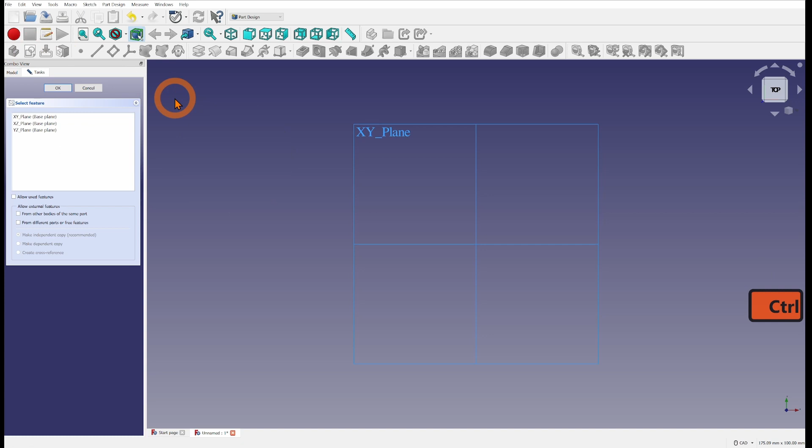Alright, so let's create a new file and let's change to our part design workbench right here. Let's create a new body, this icon right here, and let's pick which orientation we want to draw this in. So I think top is just fine. Let's create a new sketch, clicky, select our XY plane, and let's move over right here because we're just going to be drawing in this section right here.

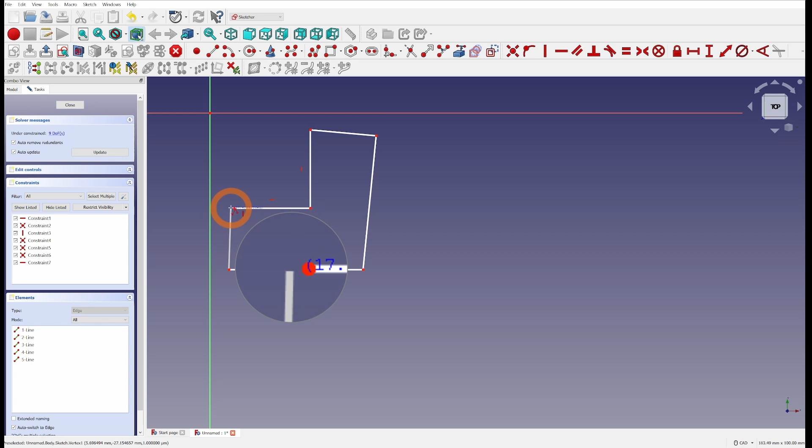Let's use our buddy, the old polyline tool, clicky, and right now let's throw caution to the wind. So let's just draw this shape right here. And when you get to the end point, you want to click on the first point till it goes yellow like this. And you'll know you've done it right when the command just ends. So now let's constrain this guy up.

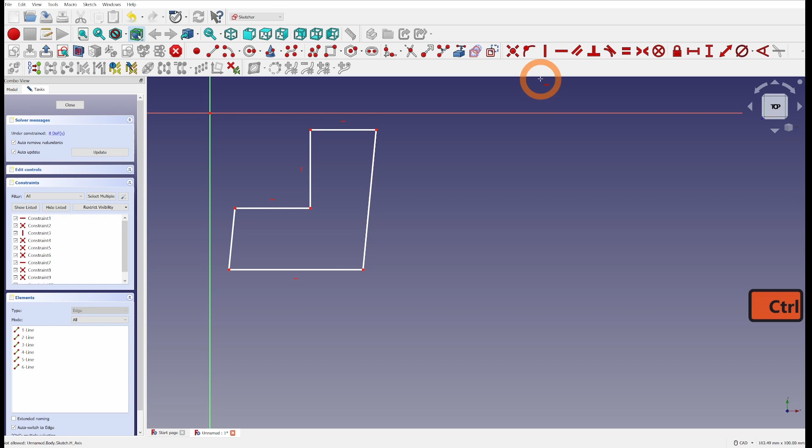So first of all, let's use our horizontal constraint right here. And I can see this guy already has one, this guy already has one, and this guy does not. So we're going to add one. Next, we're going to add the vertical constraint. This guy right here, clicky. All right, this guy already has one. This guy does not. So we're going to click here. And lastly, let's click on this guy. And this guy has one now.

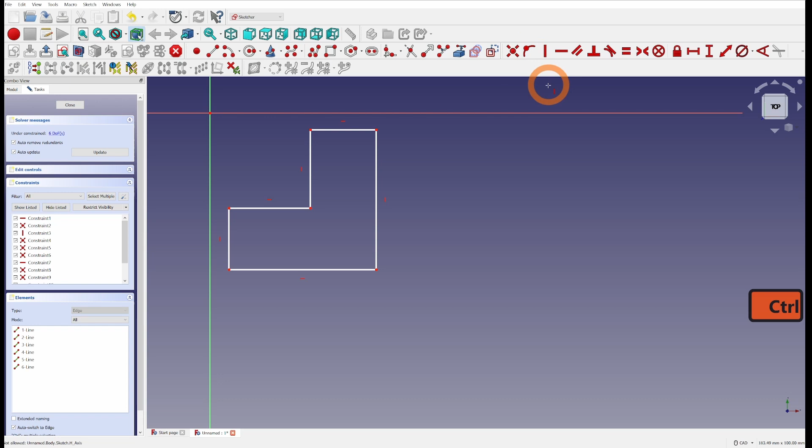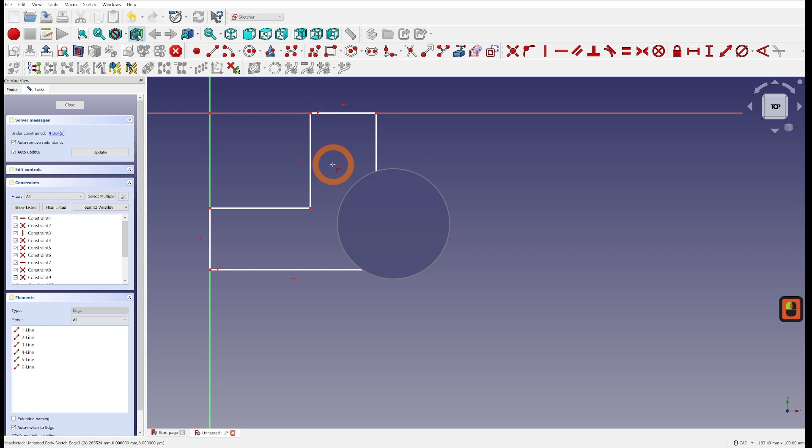Beautiful. Next, I want to constrain this line right here to this line right here. And the easiest way to do that is by using our constrain point onto object. Click here. And now either click on this point or click on this point and move until you're yellow on this line. Beautiful. And same thing with one of these 2 points up here. I'll just pick this guy here, go up here, clicky, and we are done with our base shape.

So next, we're going to have to add some dimensions. So let's start by adding a horizontal dimension. So this command right here, clicky. Click on them right here, and I want to make this 14 millimeters. Next, I want to make this guy down here 22.6 millimeters. Beautiful.

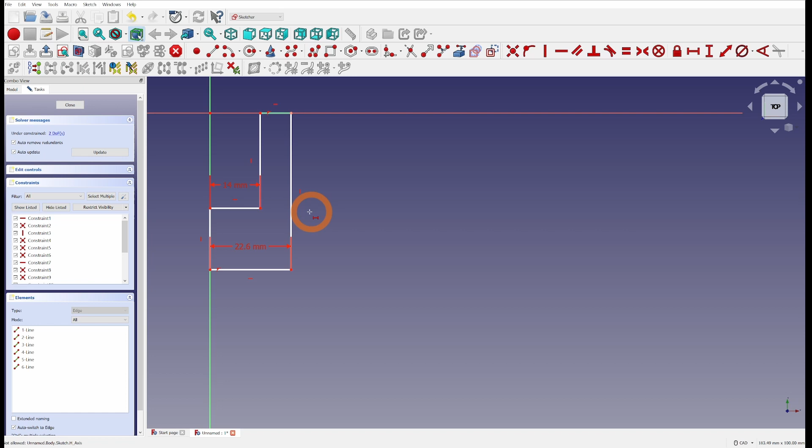And next, let's add some vertical distance constraints. So this guy right here, clicky. And the first one I want is this guy here. Let's make him 4.4 millimeters. And the next one, let's go this guy right here. And we'll make him a cool 9 mil.

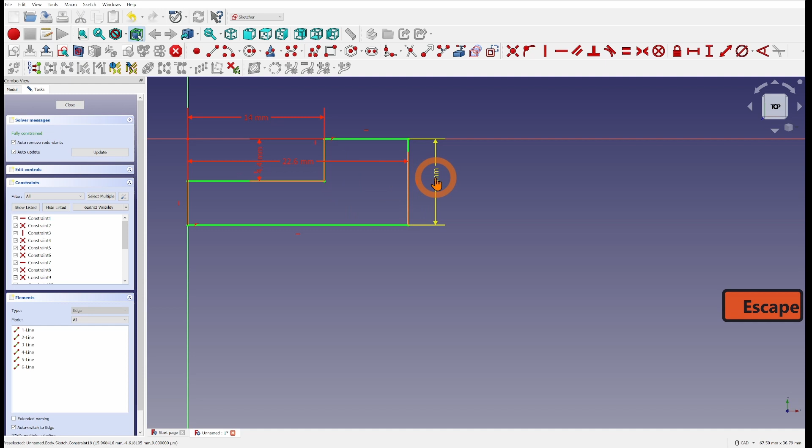Now let's just zoom in. And of course we can clean these up. So let's put these dimensions into a nicer area so we can read them easier. There, that looks good to me. Maybe move this guy down here. Beautiful. Now let's close this up. And next, let's go into our tree. So click model right over here and click on our sketch.

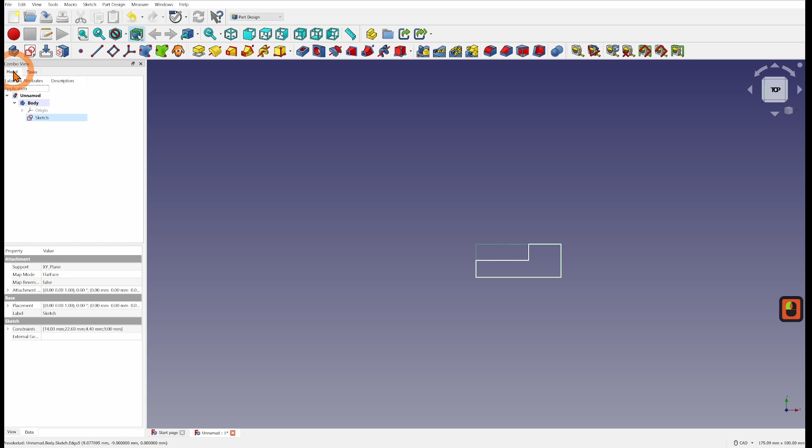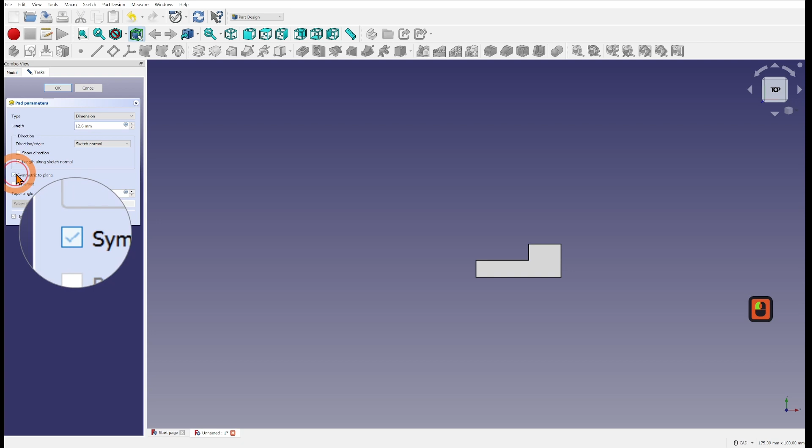And let's pad this sucker out. So that's this command right here. Click him. And now let's make this pad out 12.6 millimeters. But before we go, I want this symmetric to plane. So make sure that you guys select this right here. Very important. Click OK. And now you can see we have our base shape. Rockin'. So let's hit home just to maximize it here.

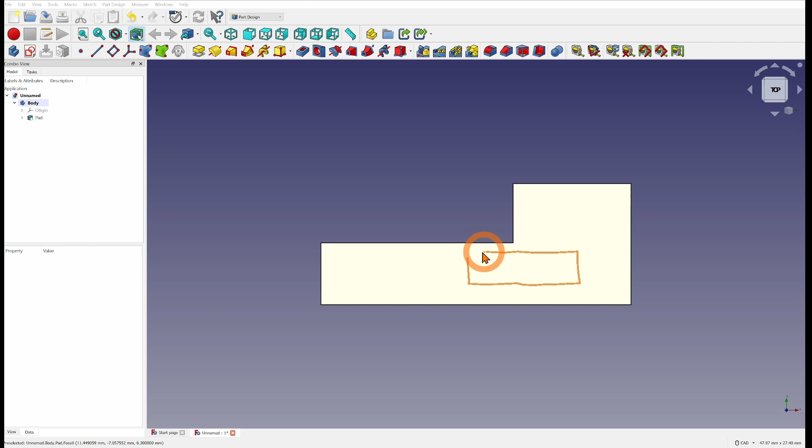So remember when I told you that there's 4 embedded magnets in this? What I want to draw next is the area for the magnet right here. Because afterwards, what we're going to do is we're going to mirror this across here, which will make another shape like this with our magnet cutout. Then we're going to mirror this again, which will create the same shape on this side with a magnet cutout along with this right here.

Thanks to this trick, we're only going to have to draw one cutout and we're going to get 4 times more work. This is how you sneak a coffee break in at work, boys, by working smarter, not harder.

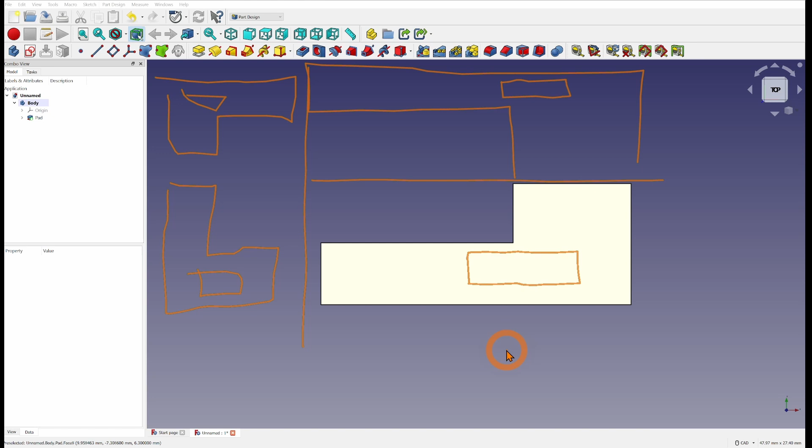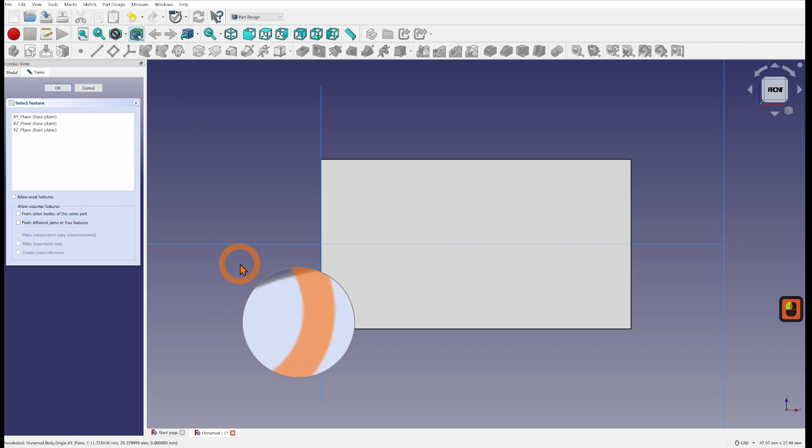So since we drew this guy on top, we're either going to have to work from the front plane, which we can access through here, or you can use your navigation cube right here. So once we're on the front, we're going to have to create a new sketch. Let's click this guy, and the sketch plane that we want to use, just zoom out till you can see it right there, XZ plane, and we're in our drawing.

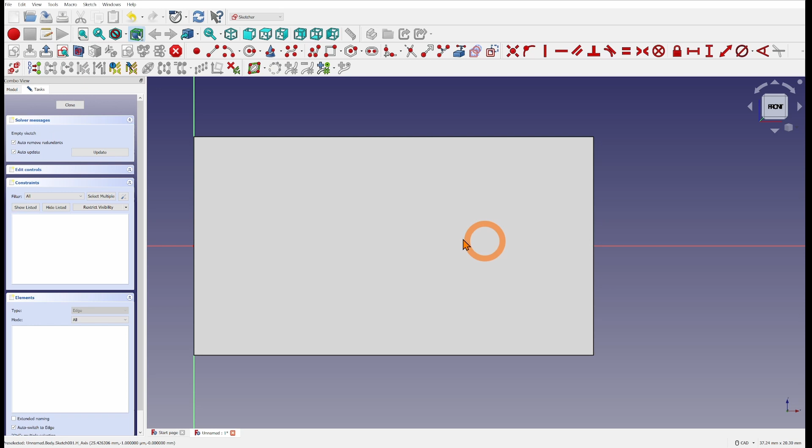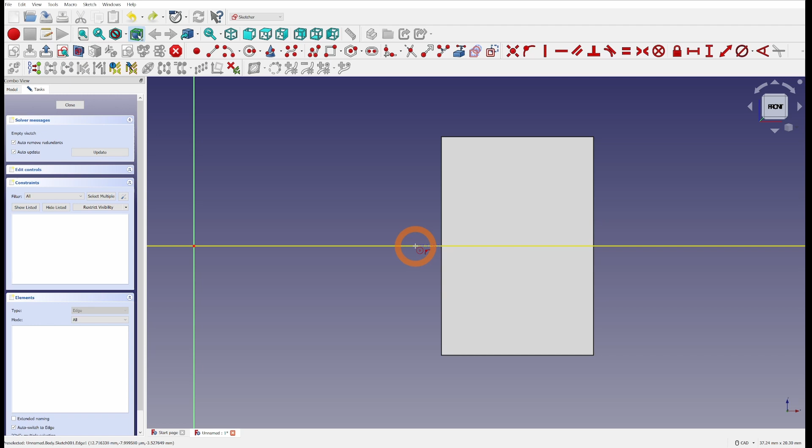Beautiful. So now what I want to do is draw the area for my magnet. So now that I'm zoomed in, I want to be able to see this line here because this model is blocking me right now. And to do that, we use this guy right here, the view section, click on him, and there you go. All the stuff in front of my plane just magically disappeared. Now let's select a circle. So now go up here until this line turns yellow. This will auto constrain this to our line. So we're going to click.

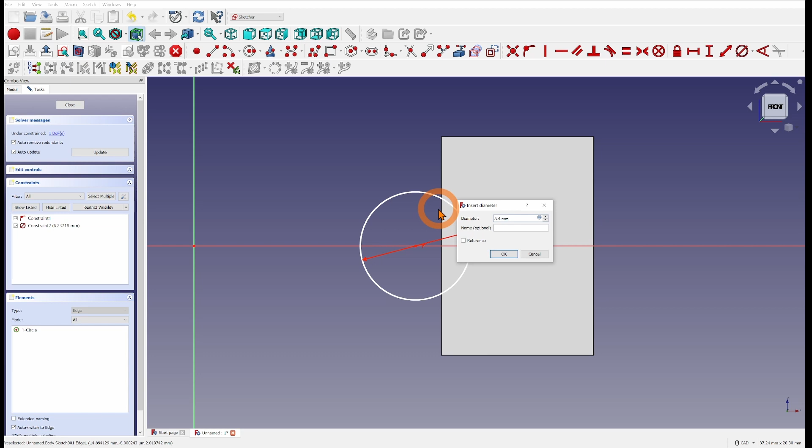So next, let's give it a diameter right here. Click anywhere on that line till it goes yellow. And now let's make this 8.4. Now my magnets are 8 millimeters in size, but you always want to add that little bit in, just so that they seat in there nicely. The top faces, the 2 flat parts of the magnet, I'm going to make exactly 2 millimeters, which is their thickness. So it will have enough clamp force so that it doesn't rattle around.

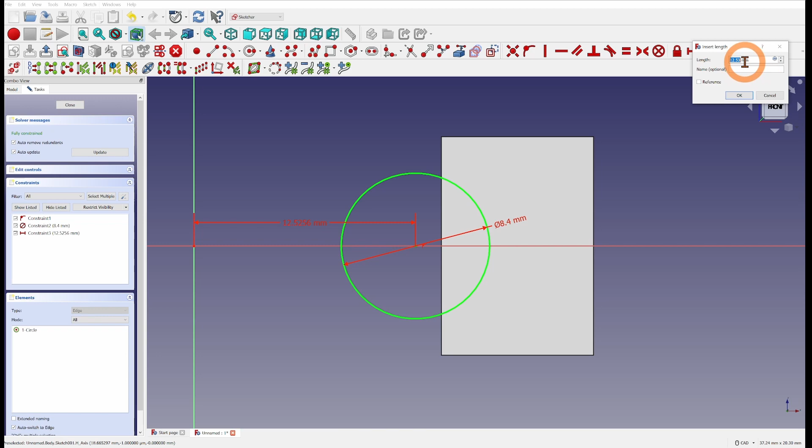So we're almost done. So all we need to do is just define the distance from the center of the circle over to our origin point. And you know what? That's pretty easy to do. You can just click on the center of the circle till it goes green like this. And then you could just cheat by clicking the horizontal distance tool. And now all we have to do is set the distance, 14 millimeters.

We're not done yet. This may be the shape of our magnet, but we still have to be able to get the magnet in here. At this point, the only way I could get the magnet in is if I'm done printing halfway, in which case that magnet is going to stick out over the top. So when my print head comes through to print the next layer, it's just going to clip it. So we're going to have to make a channel here so that we can drop our magnet into.

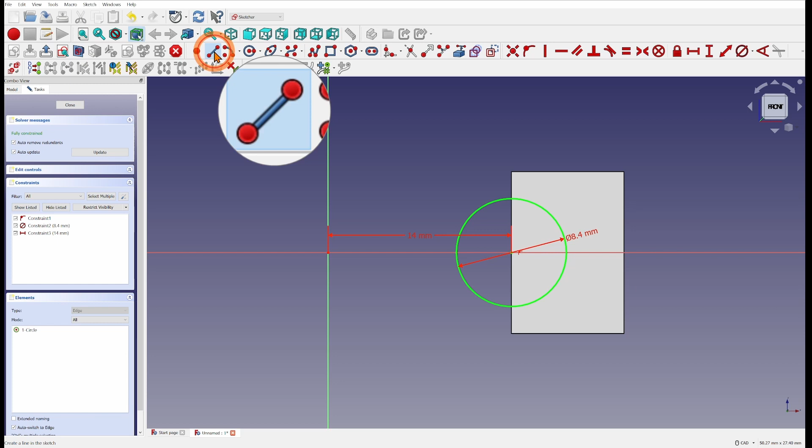And in order to do that, we are going to use a construction line to cut the circle. So let's click here in order to change our tools into construction mode. As you can see, they are blue, and I'll click on the create line. Now click anywhere to the left of the circle on this line until it goes yellow and drag it through the circle and make sure the line goes yellow again. Click. Now just right click to cancel the command.

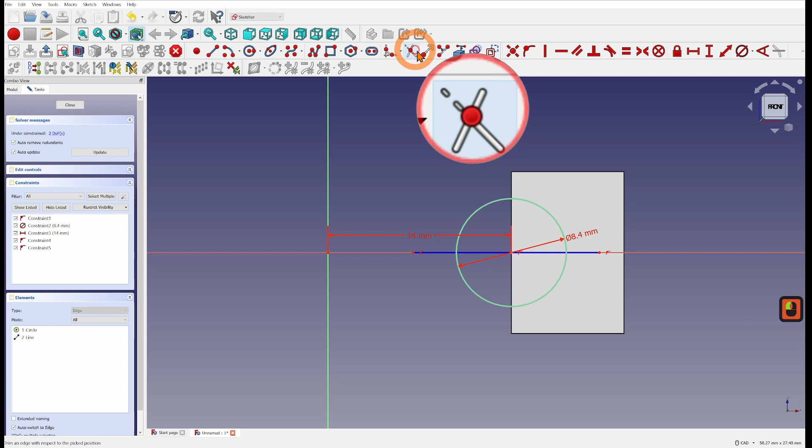And now we want to go to our trim edge tool. So click on this guy and click on the top part of the circle right here. And when you click on there, it should cut it right back down to that construction line. So now right click, and you know what? We don't need that construction line anymore. It's served its purpose, so we'll just delete it.

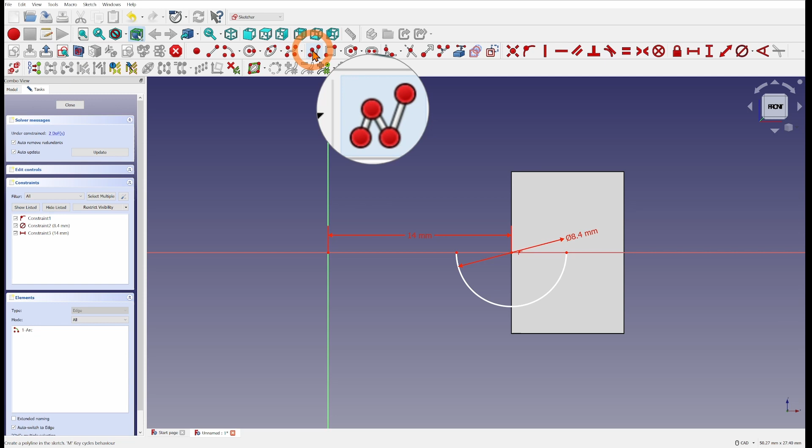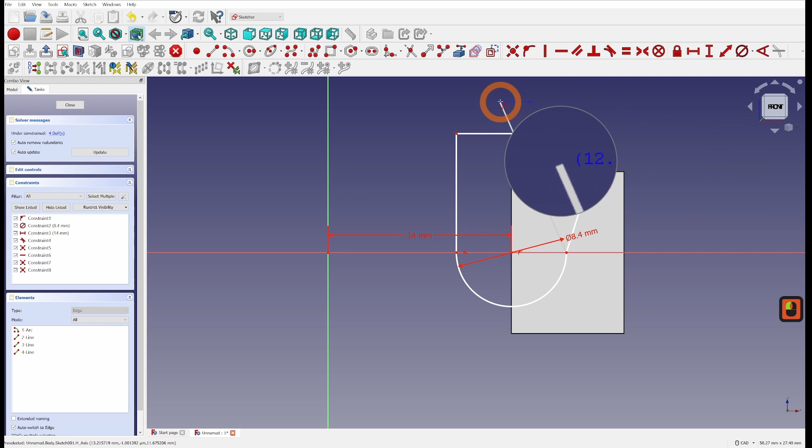And now let's go back, click this guy, because we're going to be going back to our trusty polyline tool. Click, and go down to this little edge right here, that point of the circle. So we'll click there, we'll go up, click, over, click, and go back down till we're at this point right here. And even though the command still hasn't finished, as you can see, we're just going to hit escape to make it go away.

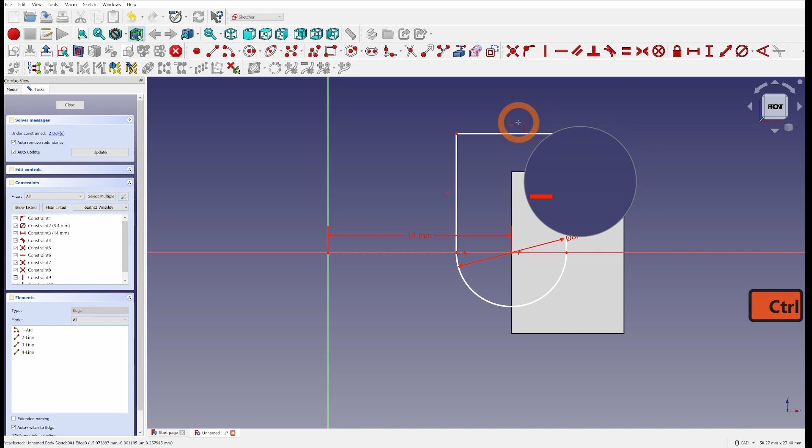So now next, make sure that this has a vertical constraint. So we'll click here and we'll click on this guy right there. It just popped up right here. We'll make sure that this line also has a vertical constraint. So click here. You can see it's there. And as you can see, we already have a horizontal constraint on this guy, so we don't have to add one in.

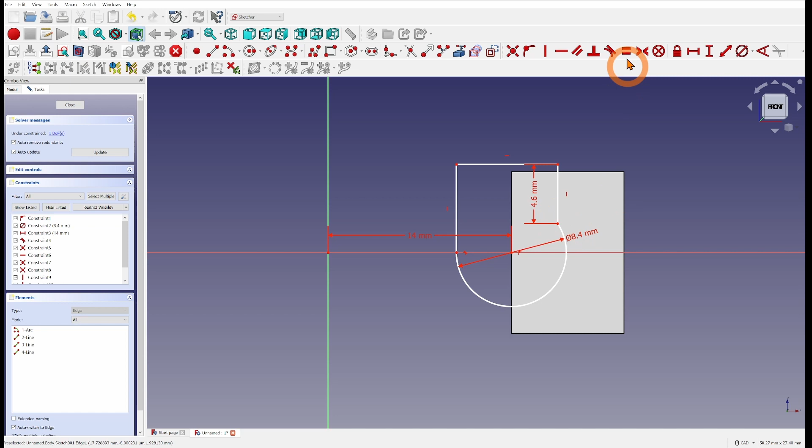All that's left to do is we just need the height of this channel. So let's give it a vertical distance constraint right here. And click on this line. And we want this to be 4.6 millimeters. Now, check out what happened. If this happened to you, very easy fix. This dot here is not constrained to this line. So we're just going to go to our constraint command right here, constraint to point. Click on that dot. Click on that line. All done, all fully constrained.

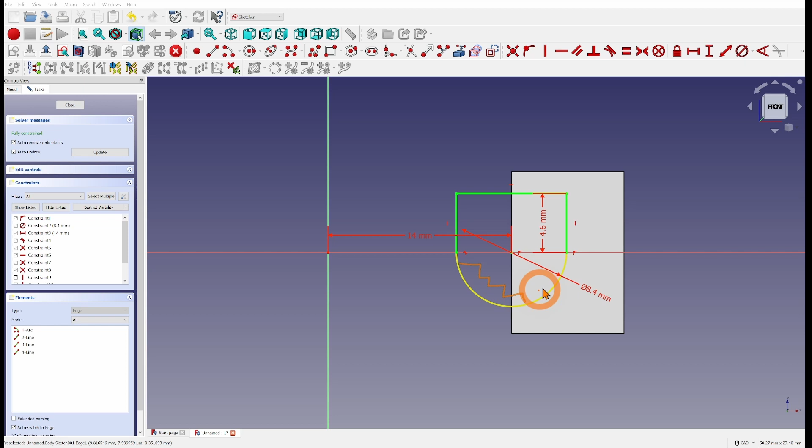You might be thinking, why is this channel so much larger? We're at 8.4 millimeters for an 8mm magnet. Well, whenever a slicer slices a circle in a horizontal orientation, it kind of looks like steps. And some of these steps just come up a little higher, so we probably don't have that full range. Second of all, there's a little bit of expansion that can happen or debris that can fall down. So we really want to give ourselves that little bit of extra wiggle room.

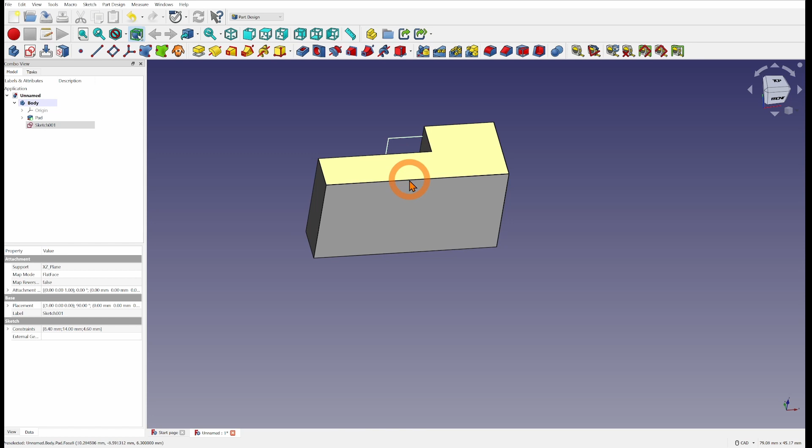So now let's close this off. All right, beautiful. So to see our sketch, let's rotate this around. And as you can tell, it is at that front plane. But I want this to be over a little bit this way. So all I have to do is click over here, go to Attachment Editor, and now we want to move this point. So I'm going to click on top, scroll down here so I can see this easier.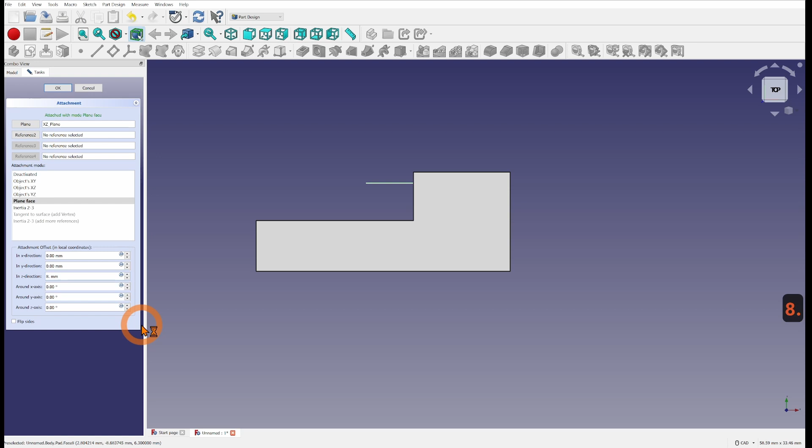Now this uses FreeCAD's own directions, not what you see over here, so don't get confused. And I believe it's the Z direction. So if I click Z, see, I can see it going up if I go into the negatives and down if I go into the positives. So if you remember, this edge here is 9 millimeters. So I want this to be 8.2 millimeters. This will give us 0.8 millimeters to the edge or 2 0.4 nozzle lengths, so a perimeter of 2.

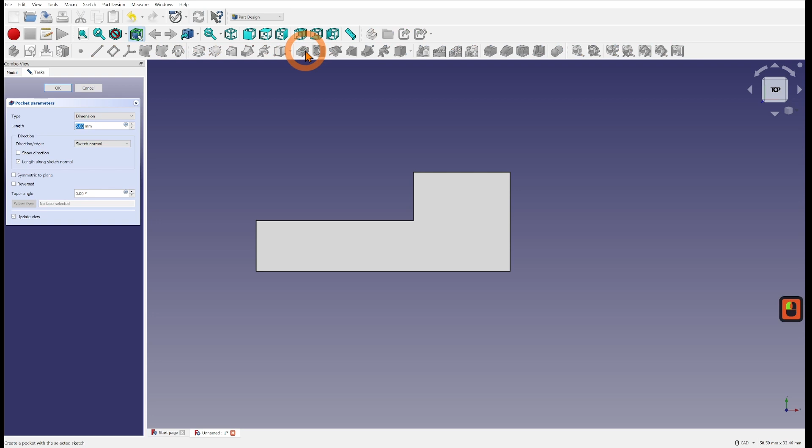You want to keep your magnet as close as you can to the edge because a magnetic field weakens with distance. And now I want to click on Sketch, Pocket right here, and I'm going to make this 2 millimeters, which is the thickness of my magnets. And if you want to know whether this is going the right way or the wrong way, all you have to do is click reverse. If it punches out the bottom, it's going the wrong way.

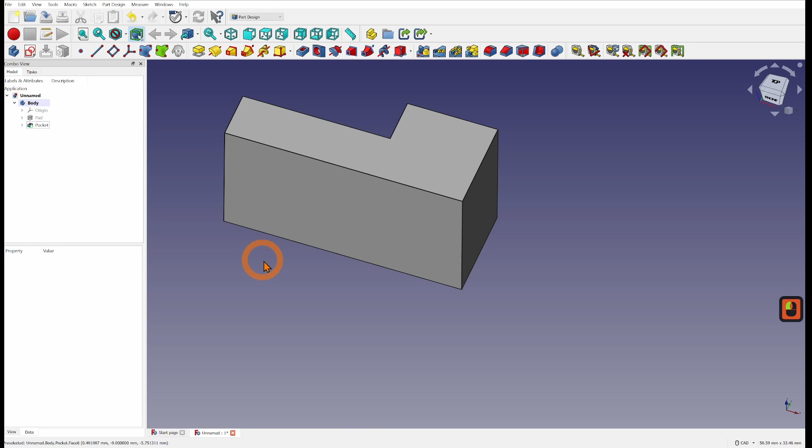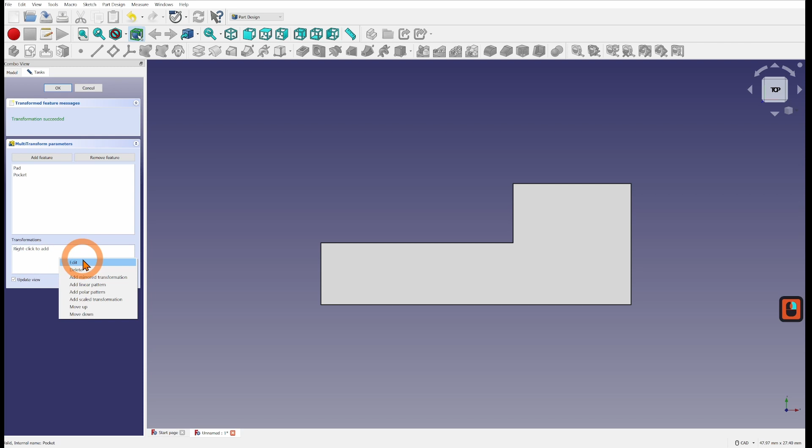All right, so now that I got these two, I'm just going to click on top here, and I'm going to hit home just to center things up. And this is where our magic happens. Click on pad, click on pocket, and click right here on our multi-transform tool. You'll notice we have our pad and our pocket selected in there, and down here, just right click and go add mirrored transform. It will add a mirror transform on our vertical axis, and now we can right click on here again, add another mirror transform on a horizontal axis.

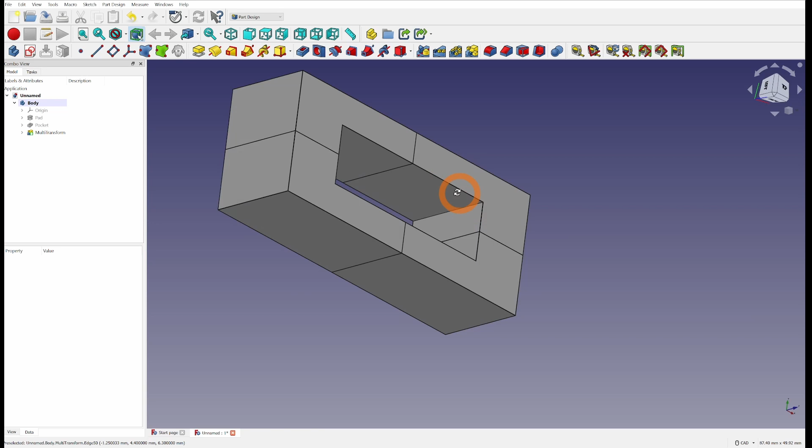And now click OK and check this out. We have our main body for our key holder or our keychain. We got most of the hard work done, but I don't like this. I don't like how it's different shapes here. Let's kind of fix that. Let's get rid of these lines. And that is stupidly simple.

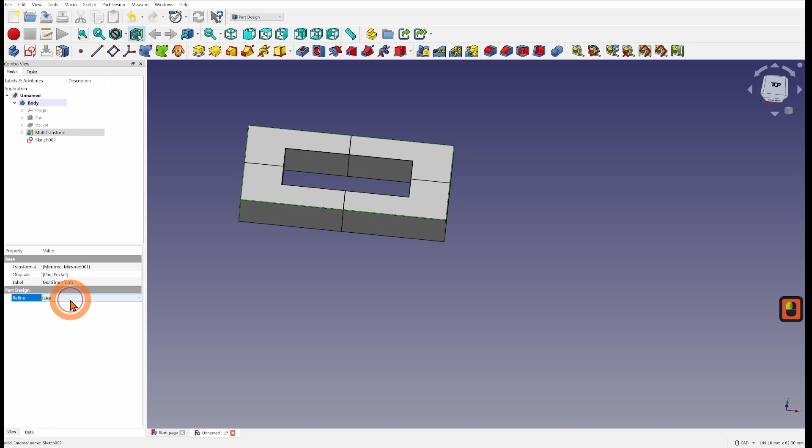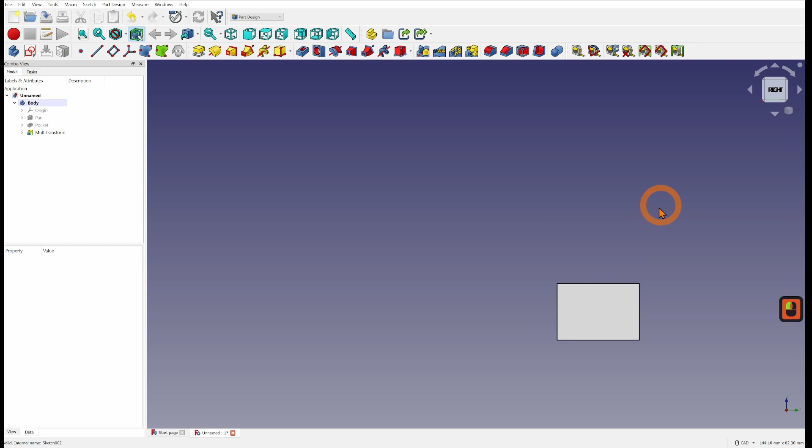I'm just going to click on multi-transform, and right here where you see refine, change that from false to true. And now click on your body right here, right click, and go recompute object. And then you should see this go all solid. Beautiful. And I'm going to create another sketch. And I want to create a sketch on this plane right here, which would be our right. All right, let's just zoom in nicely and recenter. Just click on this button right here.

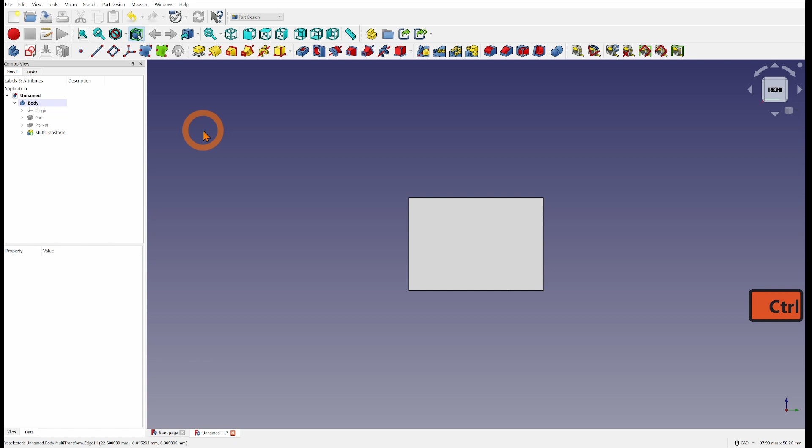And now what I want to do is create a cutout for our bubble level. And you know what? We're going to be following the same pattern as before, except we're going to get a little bit sneaky this time. So let's create a new sketch. Clicky. And we want this on that YZ plane. Beauty. Let's make sure we can see everything by using our view select. There we go. And look, we can actually see our little magnet cutouts there.

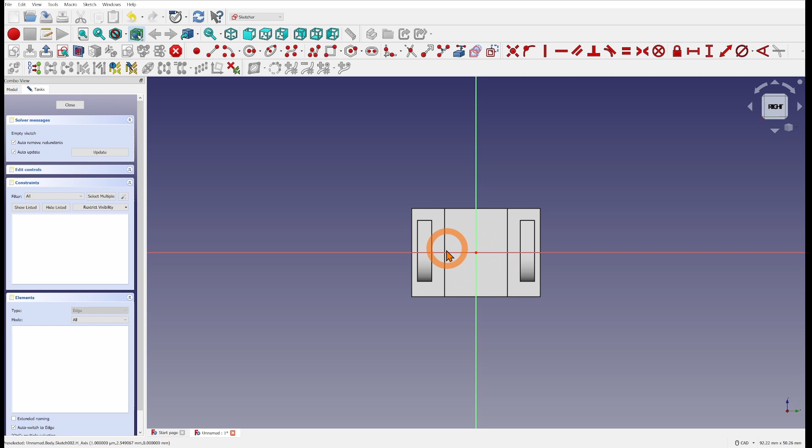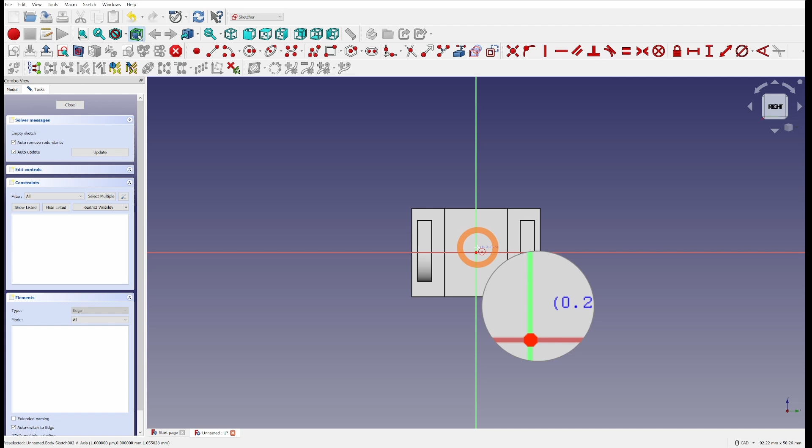Isn't that awesome? So the magnets are the exact same size as the bubble level. They're 8 millimeters in diameter, but they are longer. So the 2D sketch is going to be exactly the same. The only difference is when we use our circle tool, we want to join that to the very middle. So when we click here, we don't want to click on any of these lines, not this one, not this one. We want to be real careful to click on that middle origin point when we expand it.

And since we've been through this before, I'm just going to speed this up. You can go through the chapters and rewind back to the magnet if you have to.

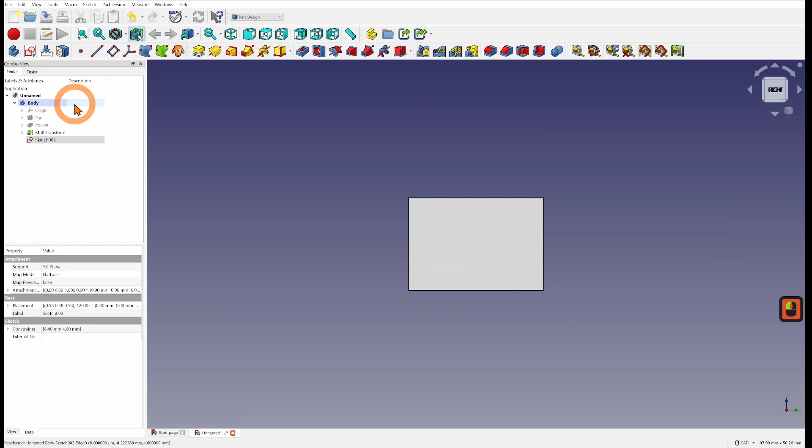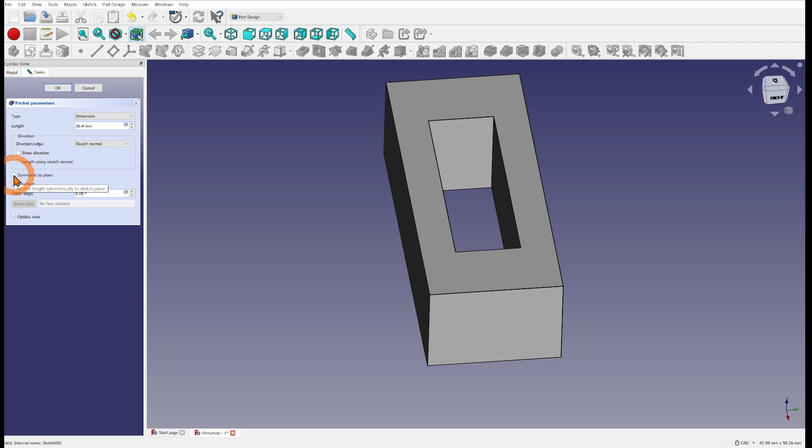So now that we have this in the middle, all we have to do is make a symmetrical pocket so that it cuts into this side and this side at the same time. So let's create a pocket. And since the bubble levels are 35 millimeters, I want to give them a little bit of clearance. So I'm going to say 36.4 millimeters. And I'm going to make this symmetric to plane. So now if you notice, it will cut it out on both sides at the same time.

I really want that long coffee break there, boys.

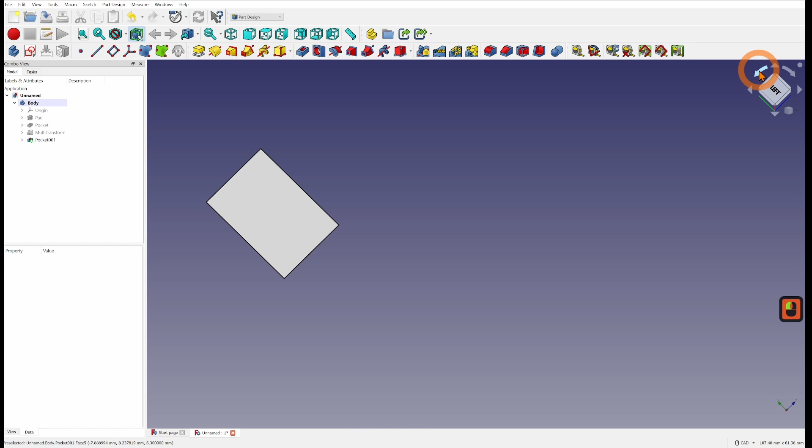So now we really just need our little key holder here. So let's click here on our cube, which is our left side. Make sure it's facing the right way. If you go over here, we've got to make sure the top is here. Let's click on that guy right there and make a new sketch. Click. So now that we're here, I'm going to make a ring holder. So for this, very, very simple.

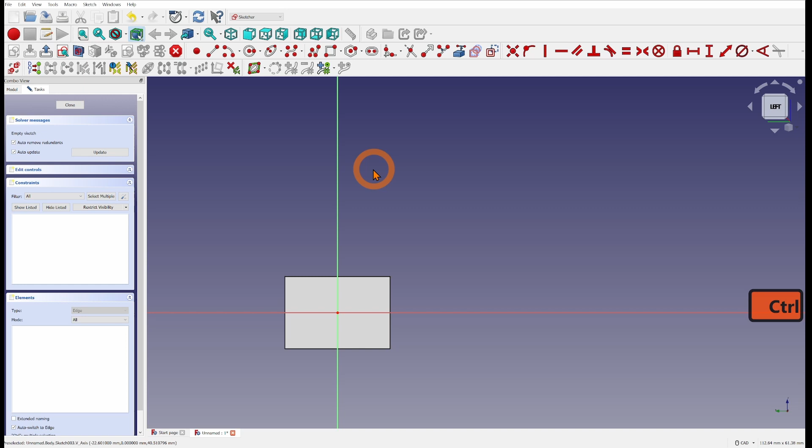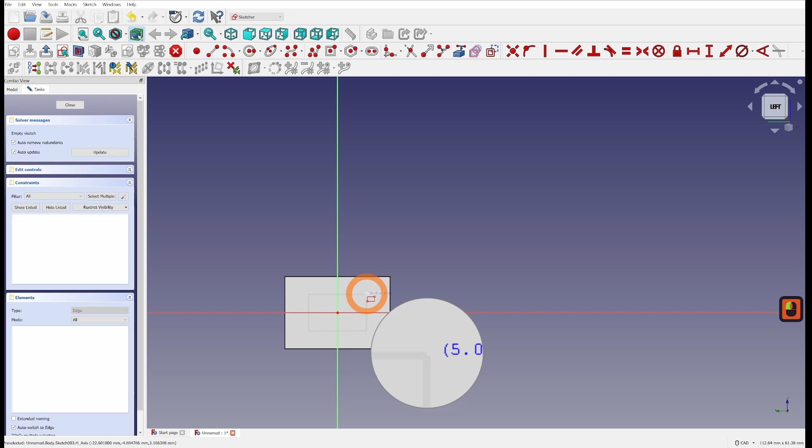Click over here on our rectangle tool, and I'm going to go down here and go to centered rectangle. This is an awesome addition. Good job, boys. Now I want to click here in the middle. You see that my middle origin point is yellow. That's what I like. And I'm just going to stretch it out to here. And now that I'm here, it's already centered. It's already a rectangle. The only thing I'm missing is some dimensions.

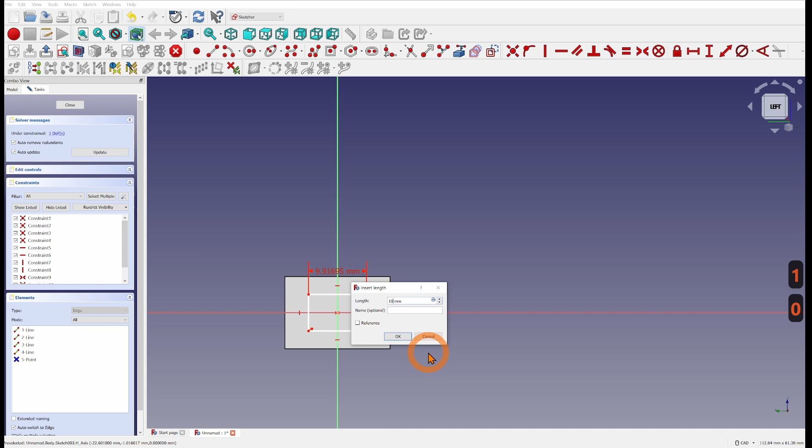So horizontal constraint over here. And I want this to be 10 millimeters. Look, 9.92. That is close. And next, I want to go to my vertical constraint or vertical distance constraint. Click on this line right here. And I want to make this 4.8 millimeters. Beauty. Clean up your measurements if you are inclined to do so.

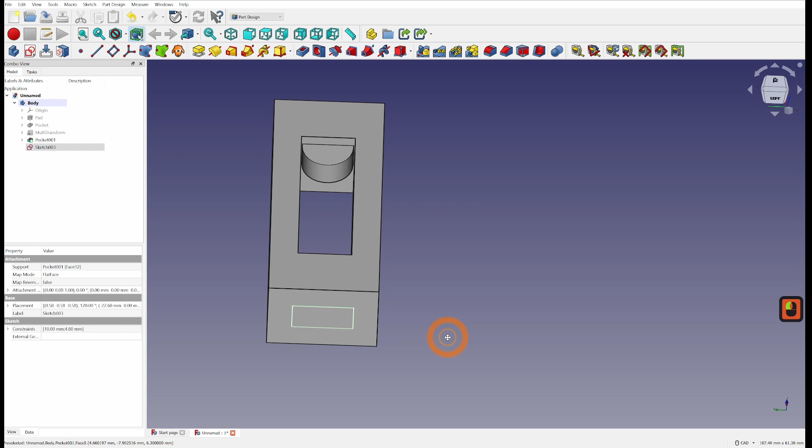And close this up. So now that I got this, you know what's happening. The good old pad. Let's pad this guy out. And I'm going to make this guy 10 millimeters. That sounds good. It's right on the money. Click OK. Lastly, we'll need a hole here for our keyring.

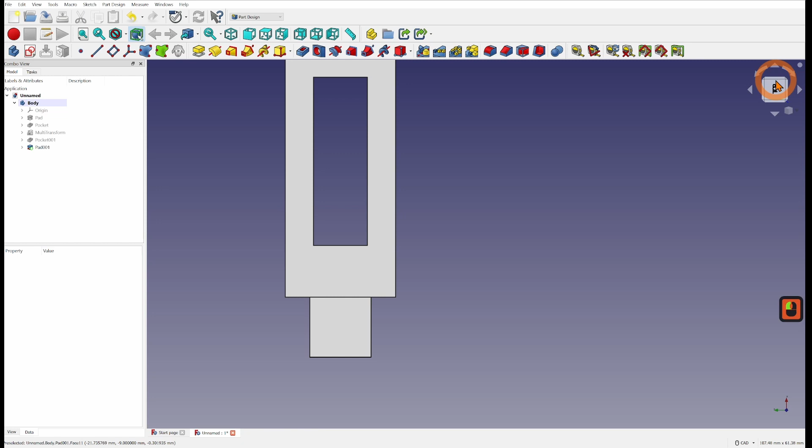So we'll just click on top. And because I'm OCD, I'll just click it like this, so that top is reading the right way. And I'll click on here. And of course, another sketch. And we will need a circle. I'm going to click on a circle here. Click on this line to make sure it goes yellow. That way we're constrained to the center point.

Click here. What should I make the diameter? I'm thinking that it should just be 4 millimeters. Click here, 4 millimeters, enter. And now the last thing, the distance from the center. Now this is really close.

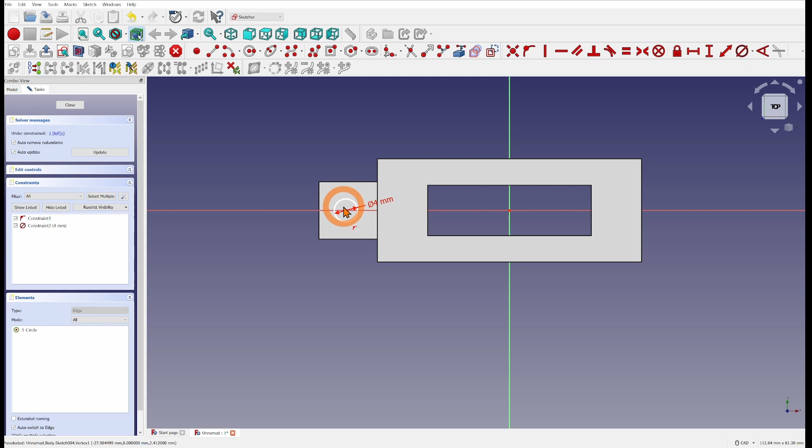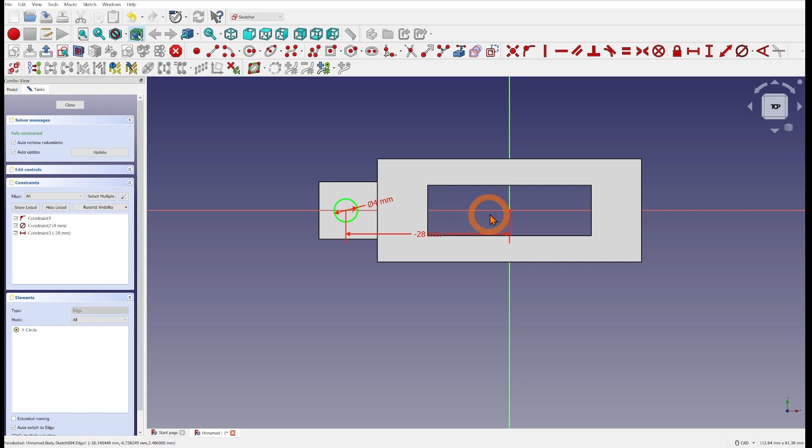So again, I'm just going to click on that middle point and maybe I'll just highlight it to get there and click on my horizontal distance constraint, which will give me a distance. And you know what? It's minus 27.96. I'm just going to round that up to minus 28. Now, if you're wondering why this measurement is in the negatives, it's just a matter of where you are. So since I selected it here, it's measuring minus 28 from the origin point.

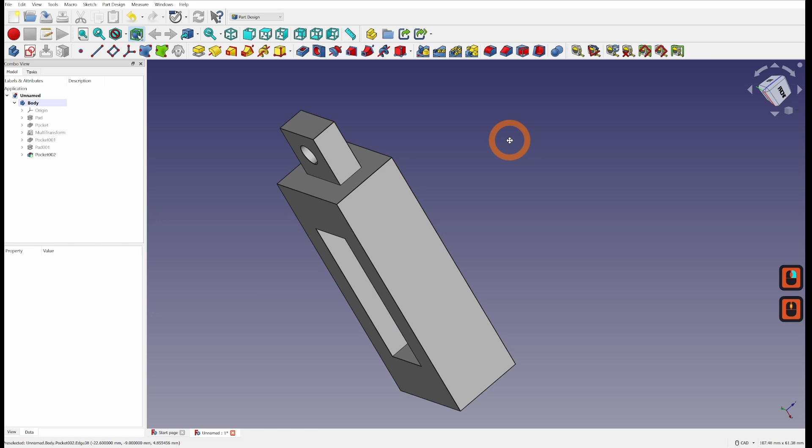So let's close this up. Let's pocket out our sketch, trusty pocket. And the distance, I'm just going to say, go up to first. And then that will just automatically make it so that it goes up to the first face that it sees, which is this one right here. So now that this thing looks like an ugly USB stick, we're just going to add some flair to this.

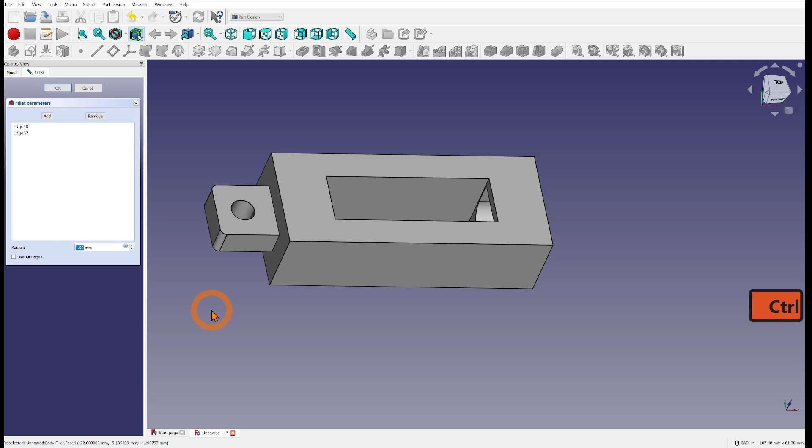So first thing I want to do, let's round this guy off. So click here, and we're going to use a fillet right there. Clicky. And for our measurement, let's eyeball this to 4.6. And look at that. That looks pretty good right there. See, it looks a lot less like a USB stick now. Next, let's go for this guy, this guy, this guy, this guy, and this guy. I'm just holding control down while I do this.

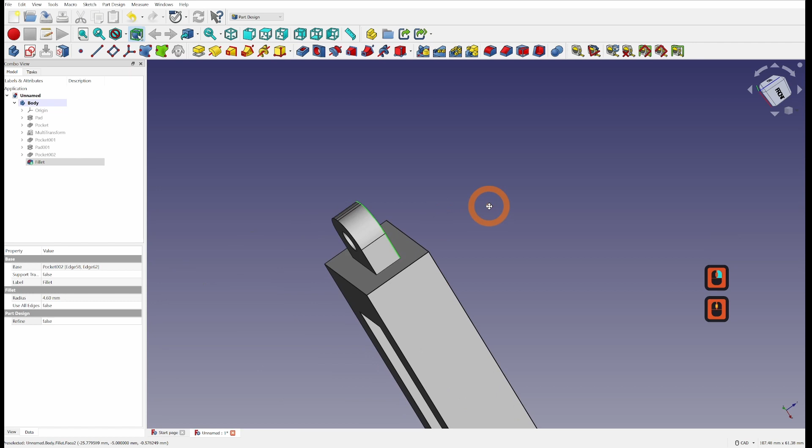And this guy, so all the way around. This guy, and now I'm just going to go back to see if I missed one. Oh, Mr. Magnifier, why did you have to betray me like that? And now I'm just going to create a chamfer here. And for this chamfer, I think I'm just going to go 1.2. I like it to be in multiples of 0.4. I can get into that in a different video. But 1.2 is one of my favorite chamfer distances.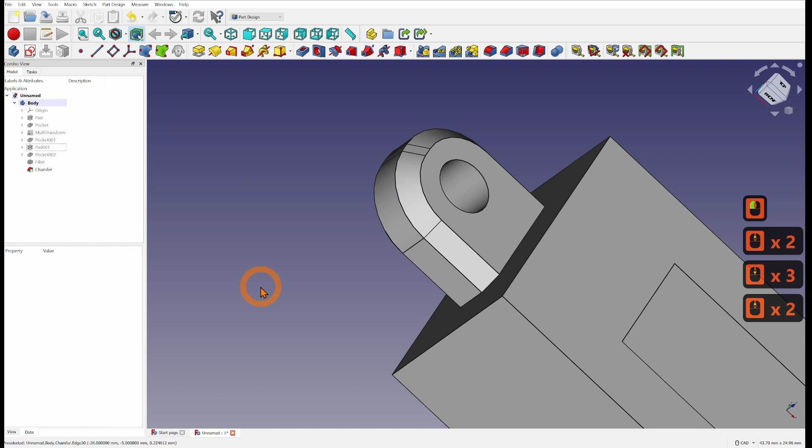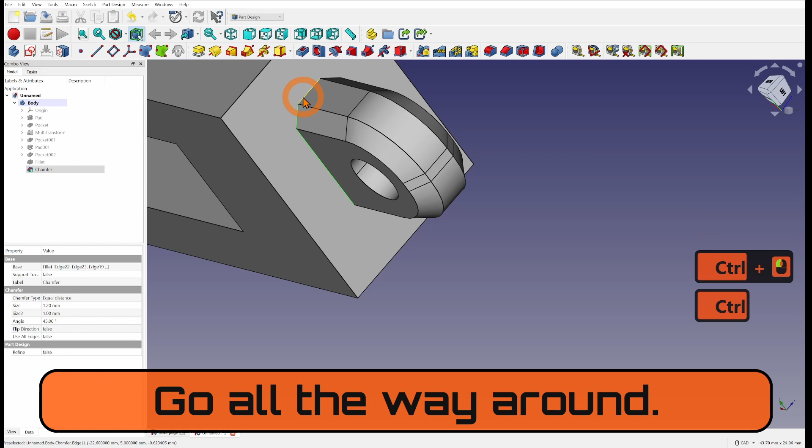And now here's a very important tip. See this guy right here? Wherever we have a 90 degree, that is a weak point in any 3D print. So this is the place where it's going to break. So I'm going to add a fillet right here, or a chamfer, whichever one I feel like. And I'm going to go all the way around here like this. And once I'm all the way around, I'm just going to use a chamfer. And for this chamfer, I think I'm going to go 1.2 again and see how that looks.

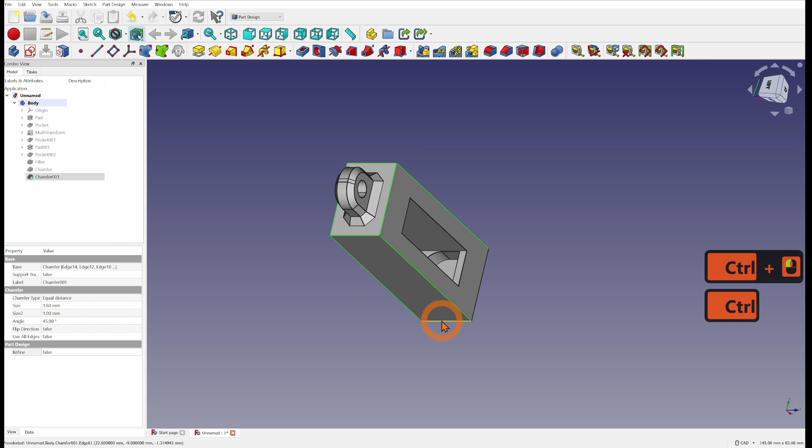So last thing is I want to chamfer all the edges here. A chamfer is really nice because it keeps those sharp corners away. You don't want holes in your pockets for your change to fall out of. Click, click, click. And once you have all of them selected, we'll just do another chamfer or another fillet. I'm sorry. Let me know in the comments if anybody here ever gets chamfers and fillets mixed up, or if it's just me. Make it 1.6.

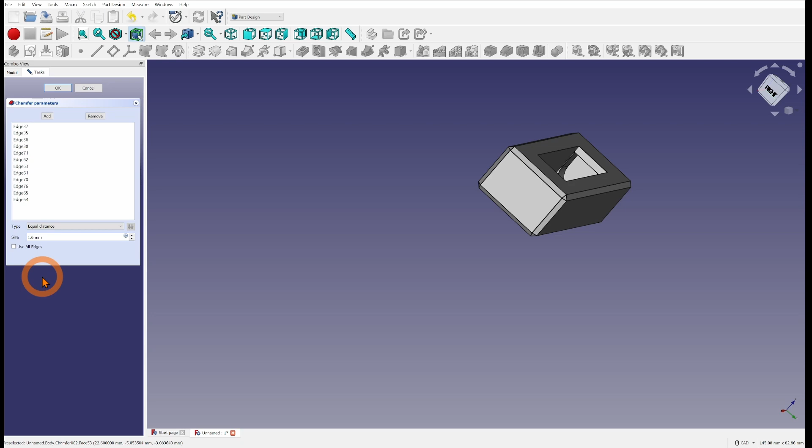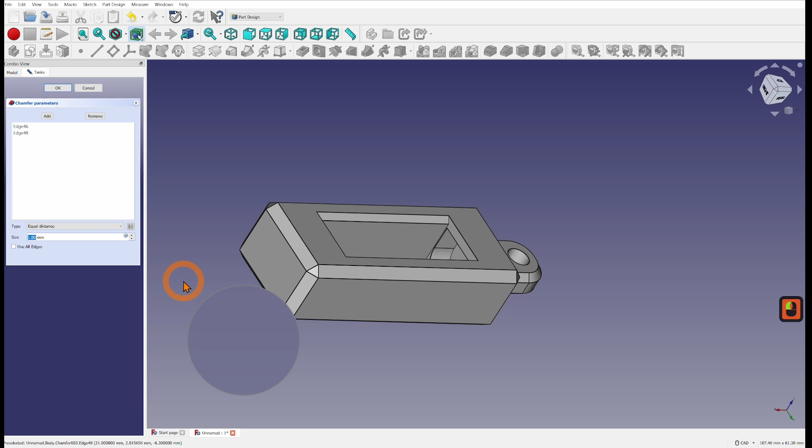So now that I got all this done, I want to create two really big chamfers here and here. And the reason I want these to be pretty big is just to make my level fairly easy to see. So I'm going to click on these two right here. I'm going to add a chamfer right here. And I think for the chamfer, I'm going to go for 2.4. Oh, well, too big. Go back, undo. Let's go 1.6. Beauty.

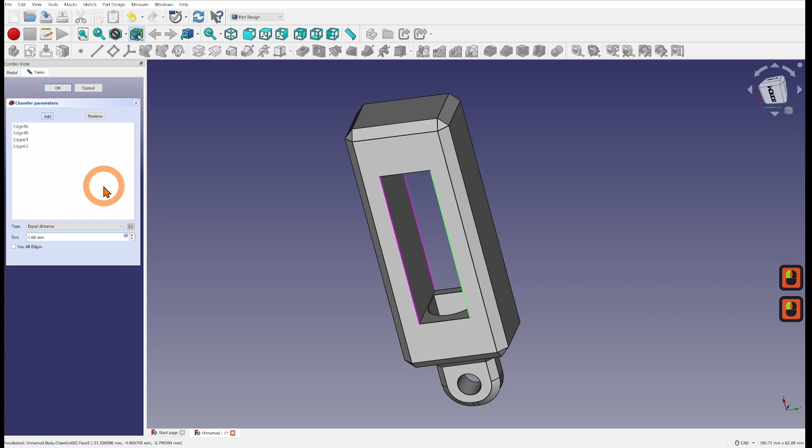And now if you ever want to add more things to a chamfer command, you could just click on the chamfer right here. Go edit, go around, click add. Now you can click on this guy right there and this guy right there, and you'll see they'll be added to the description. And then when you hit OK, they will pop right up.

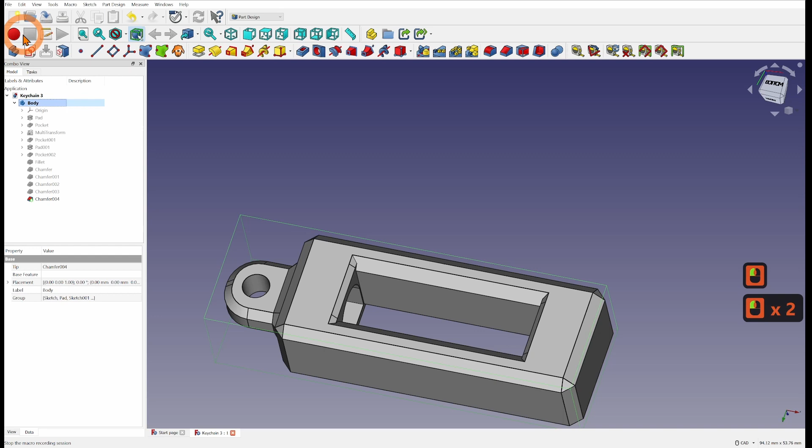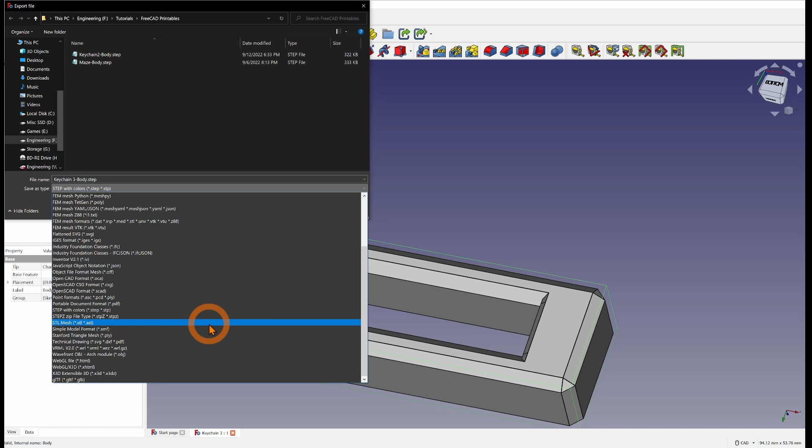So now how do I get our model into our slicer engine? Well, that's very simple. Just File, Export. But before we do that, we're going to have to select a body to export. So click here, go File, Export. And you can export in different formats such as STLs and STEPs and AMF and whatever you want. PrusaSlicer 2.4 supports importing a STEP file, but we're going to export this as an STL for now. So Keychain 3, and it automatically has the word body there. It's just a FreeCAD thing.

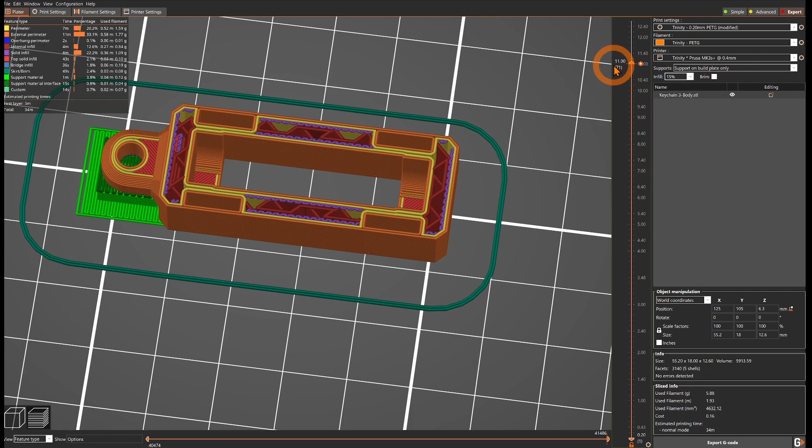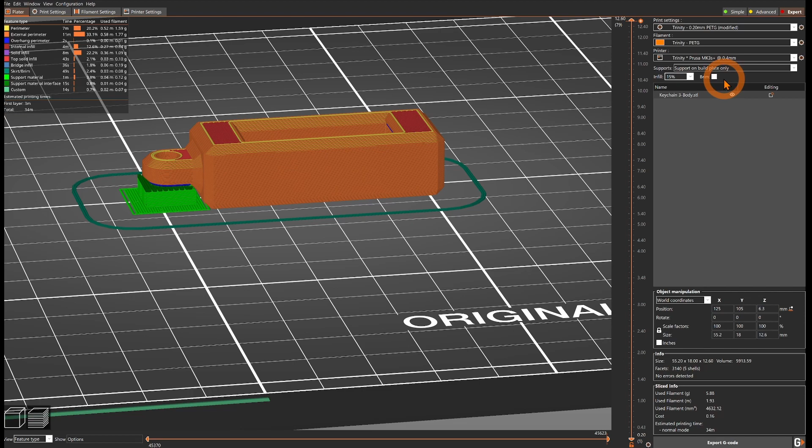It's a Jersey thing. So now that this guy is here, first thing I'm going to do is I'm going to slice real quick, and I'm going to look down here and make sure we're in the right orientation, because right here you could see that this opens up. If we were in a wrong orientation, we would see that bottom ring at the top. So of course, we're going to need supports for our lip. But since we're going to be forcing the magnets down here, there's going to be a little bit of pressure. I also want a brim.

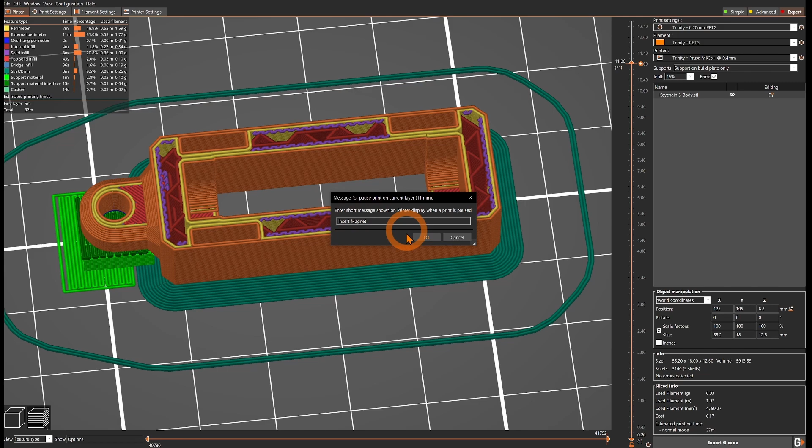And now what I want to do is I want to go down here, scroll down, keep going down until I hit this point here where these magnets are open and this bubble level area is open. Right click right here and go add pause. And of course I want a message, insert magnet. There we go. We are all ready to go.

Alright guys, that's it. I hope you guys learned something about embedding magnets into your prints, and I hope to see your keychain in a contest.